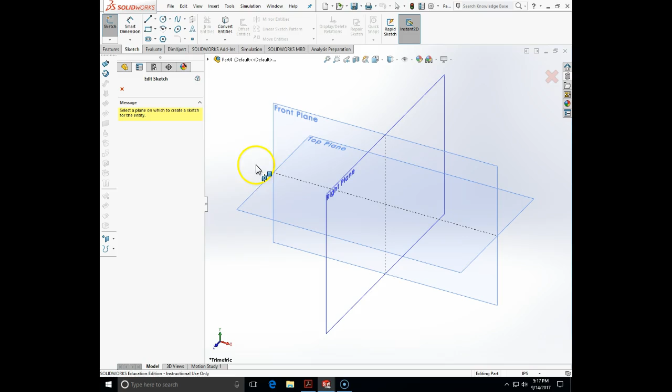We are going to do the exercise on page 310, number 5, 7. We are going to make 3 parts, which we are going to mate. Let's start with the block bottom, and this part is in MMGS units.

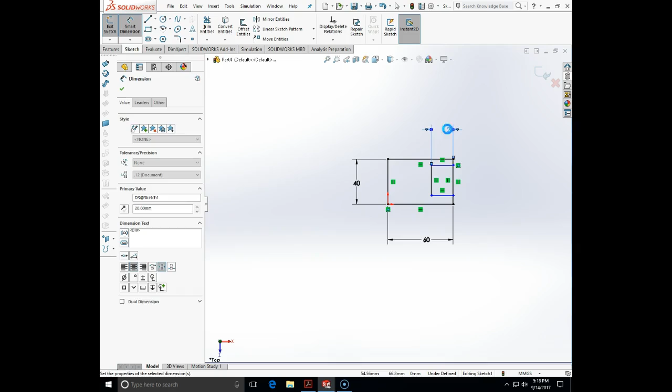Set it to millimeters. Probably the most efficient way is to make a rectangle of 60 by 40, and then we can make another rectangle inside, where the length of the inner rectangle is going to be 20, and the top and bottom distance is going to be 10 and 10 millimeters respectively.

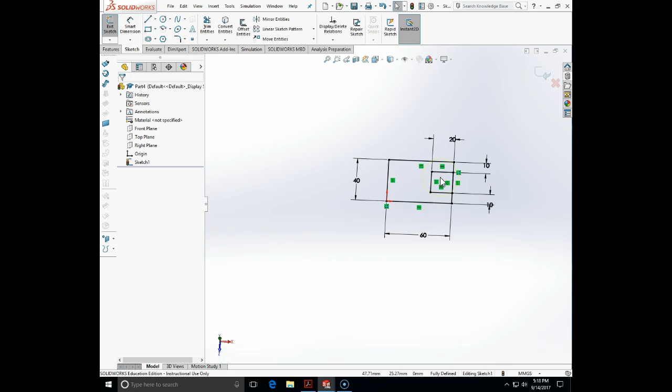Let me show you here a technique of the master sketch. This master sketch we will use to produce two extrusions: one which will be 15 millimeters thick, and that will be the entire block, and a second one which will be a top, which will be a total of 30 millimeters thick. How can we do this? We will use one sketch to make the two extruded boss features.

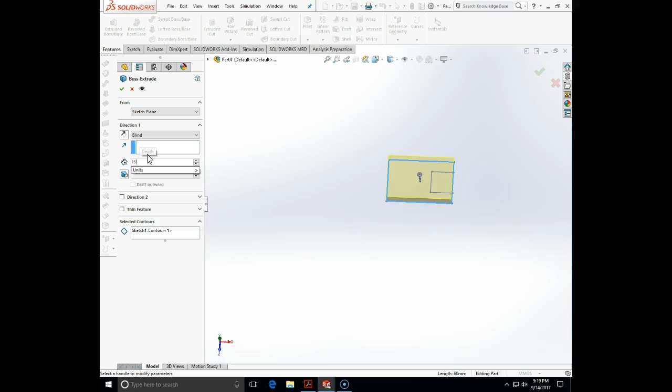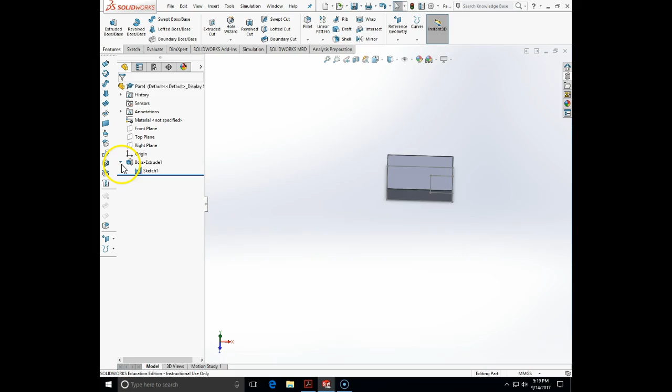I will click on the arrow, right click on the sketch, and left click on the eye. So again, I will click on the arrow in front of the boss extrude, right click on the sketch, and click on the eye to make it show. That way, look what happened -- my sketch is now shown.

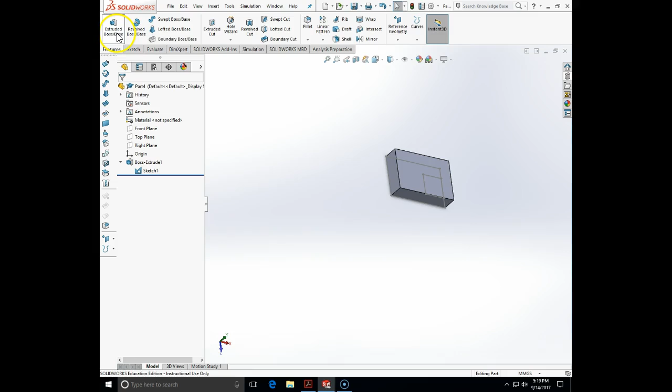Now I can reuse this sketch and its features to build the next part. So I'm going to choose the inner contour, and I'm going to extrude that inner contour as per my drawing to a 30 millimeter height. And look, I used a single sketch to create that.

Now to finish this part, I need to place a hole, and I will use the hole wizard. This is a 15 millimeter hole, M15. Let's try ANSI Metric -- it will be here somewhere. Well, ANSI Metric does not have a 15.

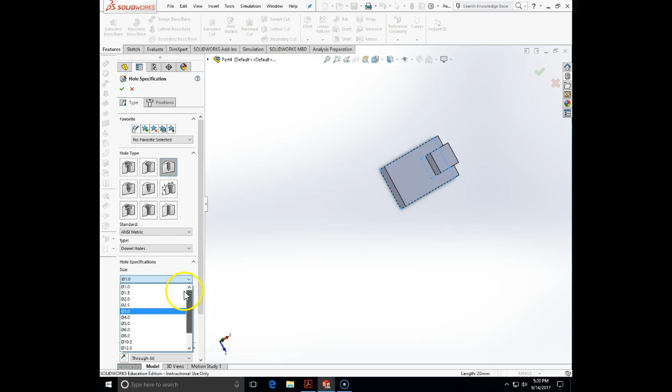Let's see if the DIN has a 15. If not, then we are going to make one. Nope. So then we need to go to a generic hole, simple. And in a generic hole we can specify whatever we want for a diameter, 15.

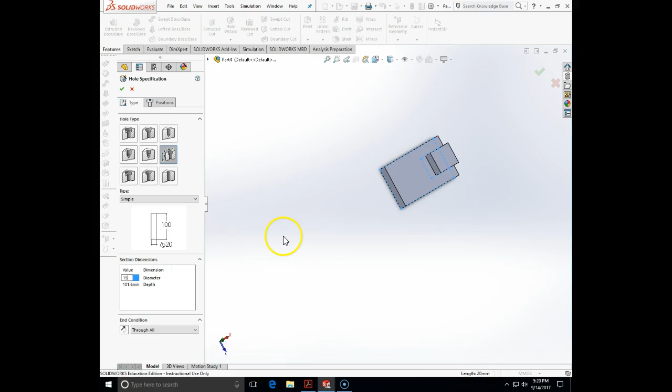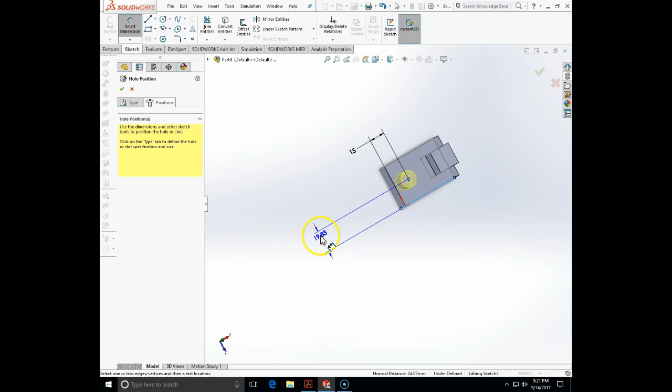Through All. Then I position the hole on this surface, and I'm going to dimension the hole to be 15 and 20, and that will be 15 and 20. Click OK, and here is my part made.

I save this as block bottom, under ENGT131, but on... where is my other drive? Okay, so it is under ENGT131, block bottom.

Now I'm going to make the block top. Do you see some similarities with the block top and block bottom? Who can tell me what are the similarities between the block top and block bottom? Both have the same dimensions. What is the only difference? Yeah, the other recess, hole.

So maybe we can actually do this. Do I need to draw everything again? No. So what I will need to do, there are two different ways. I will not introduce you yet to a configuration, but I will introduce you to something else -- how to derive one part to another by saving.

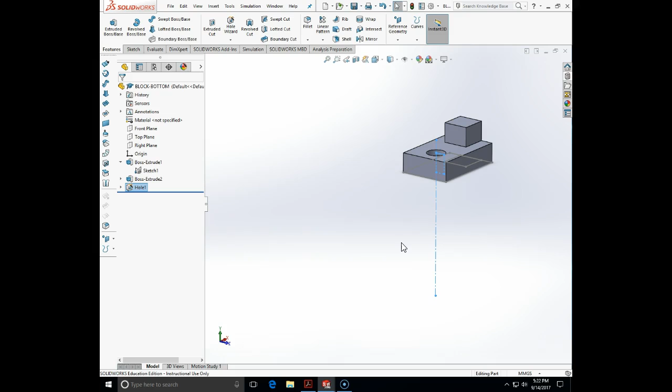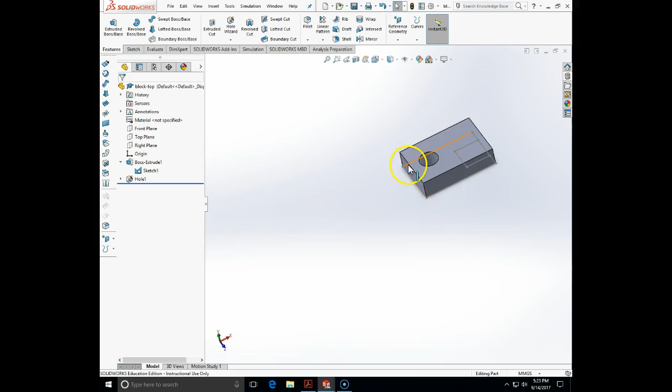I will save this part, save as block top. And now I'm going to delete my boss extrude tool. So I save it under a different file name, deleted boss extrude 2, and what I need to do is the cut. Through All. And look at this, with 3 clicks of the mouse, I have created the second part. How cool is this? I don't need to redraw everything.

Another way to do this will be to open the sketch, Ctrl-C to copy all the sketch, and then Ctrl-V to paste it into the new part. Okay, so we created the block bottom.

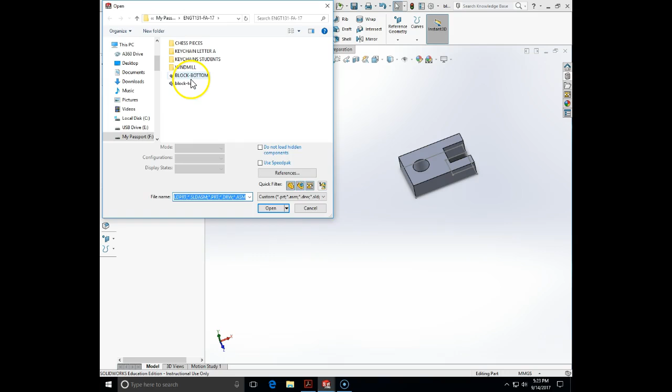We have a block top, and we have a block bottom also. Let me file open block bottom. So we have now those two. And what is the last part that we missed there? Pin.

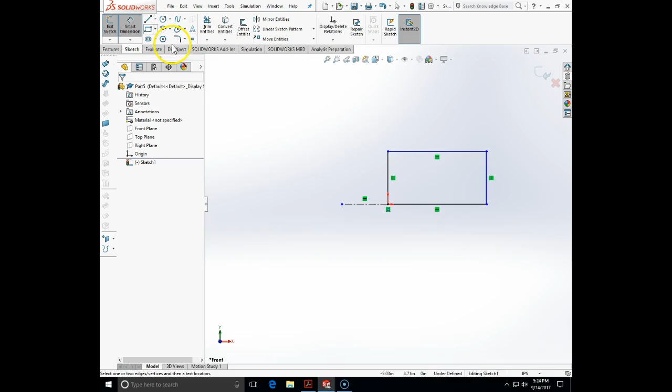And to make that pin, the post, that's a 15-15 post, I'm going to just make one rectangle, and specify a center line. I'm going to make the rectangle length of the pin -- what is it, 30. And I'm going to make the diameter by clicking on the outside to be what -- 15. Now I'm going to, in features, do a revolve.

Click OK. And what else is missing here? Chamfer. So under fillet, press on the arrow, press chamfer, and this is 2 millimeters. I did just one mistake -- what did I just do here?

IPS. So now this is 25.4 times larger. Well, I have two options. What will be the simplest way to save this? How about if I scale it by 1 over 25.4?

Yes. So features -- if I go into features, insert, actually let's see, there is a scale option. Features, where is the scale here? Go where you are. Go right -- it's under rib. No, the rib -- oh, here, under rib. Okay, scale. So 1 divided by 25.4, uniform scale.

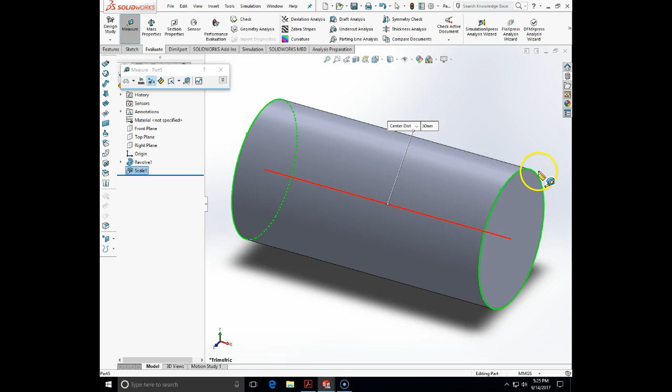One more time, can you show where... yes, okay, so I will delete the scale. So now this part is 25.4 times larger. So how can I scale it down? I will insert the scale feature. Insert feature.

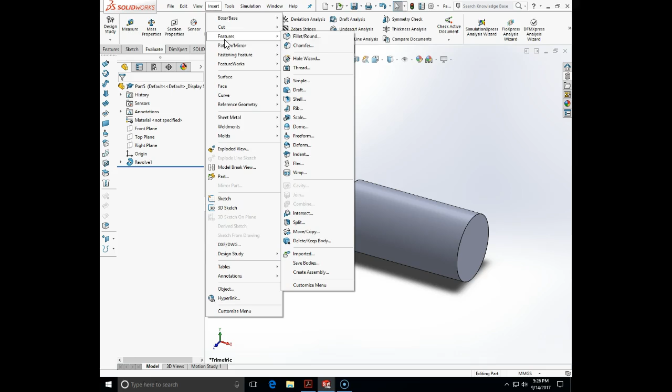Scale, around centroid, and this is the conversion factor. How I know it is 1 divided by 25.4, because there are 25.4 millimeters in 1 inch. And I click on the feature, and that's it.

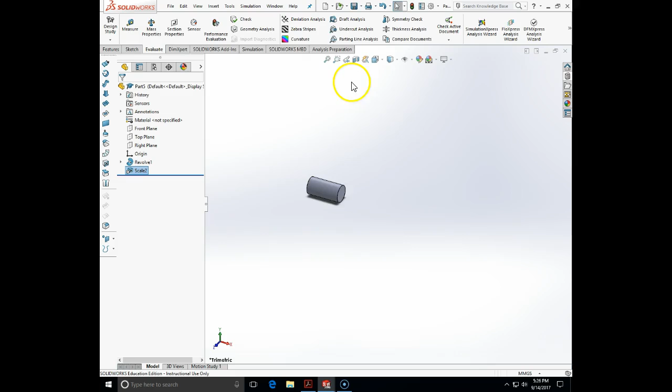And now I can insert my chamfers. 2 millimeters at 45 degrees, and I will choose my two edges. And I will save this as the D15 post.

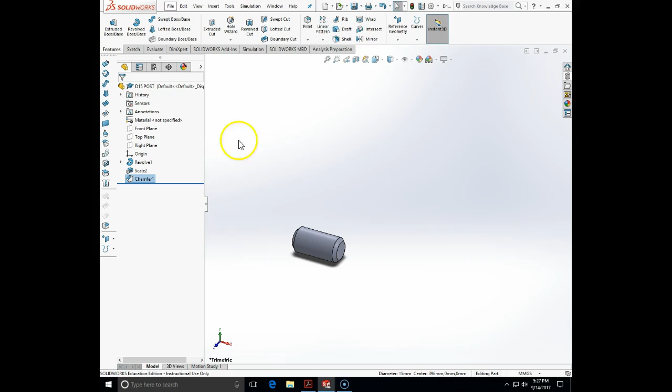The D15 post. Now I'm going to make an assembly to demonstrate to you the centered mate, the concentric mate. So we will go to the window of my block bottom, because that's my base. Going to make file, make assembly from part, block bottom, click OK, and I brought it in.

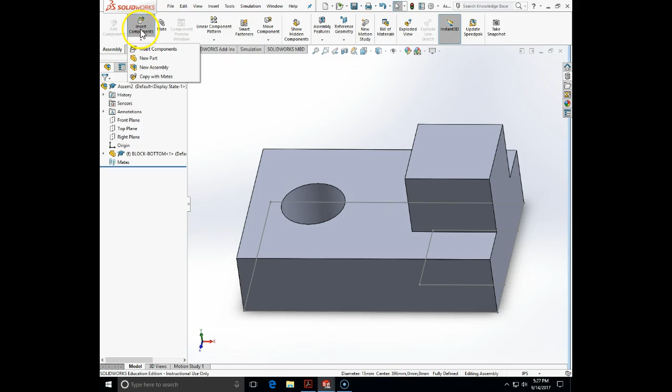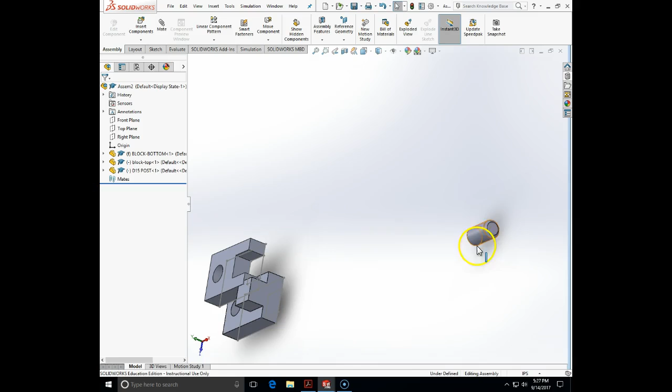Now I'm going to insert two other components. Go to insert components, insert components. I will insert the block top somewhere, and I'm going to insert the pin, the D15 post. Doesn't matter where, and orientation, okay. And I'm going to make this float, others float. Okay.

Here are now my bin of parts, and what I need to do next is mate them. The mate I want to show you today is the center mate, the concentric mate. Concentric mate is this one here. For the mate selection for a concentric mate, we need to take a cylindrical or conical surface, or any surface which has an axis of symmetry.

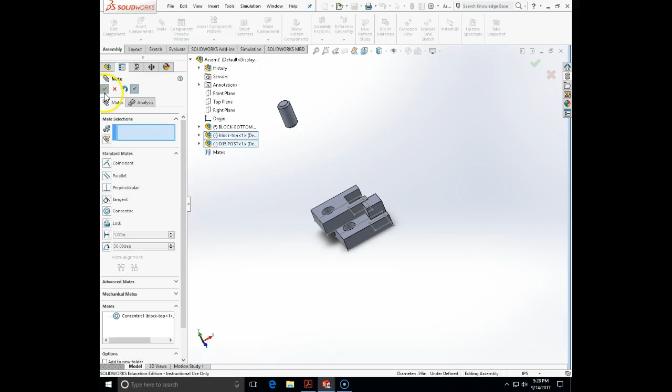So I will choose the cylindrical surface of my pin and where I want to mate it, with the cylindrical surface of the hole. And look what has happened. Now this pin is aligned with my top hole. So those two are now aligned.

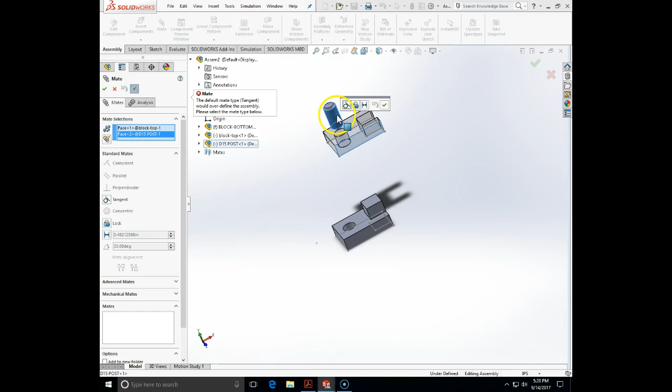Now I will do it again, and I'm going to mate concentric. I will mate the cylindrical pin with what? How about if I mate it with another hole, side the other part, and that's not tangent, that should be concentric. So mate concentric, click OK.

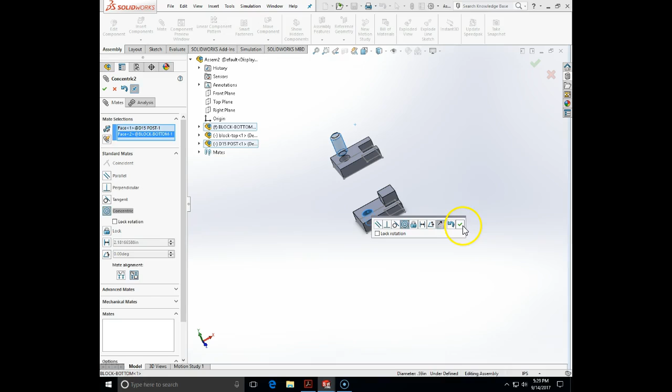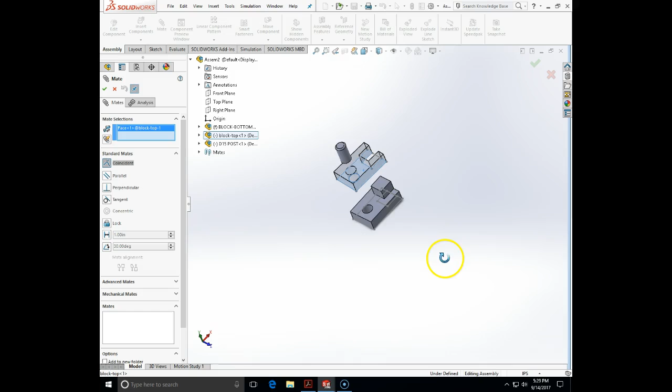Now I can't move this part anywhere, but I can still rotate it. So what I need to do next, I will use the mate which we learned last time, which is what? Coincident. So I will click on coincident. I'm going to glue the top piece to the bottom piece. Click OK. And I'm going to mate, let's say, the front and front together. Click OK. That's enough of mating this one.

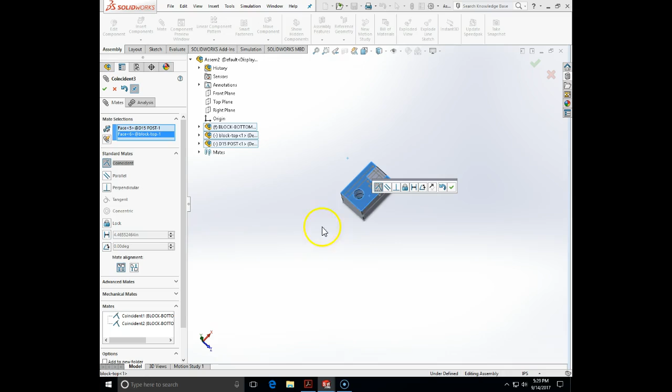And the last mate will be the top of the cylinder to a top face here. And I can also click OK here. You see that it is still underdefined, although nothing can move. But there is one thing that can move. Who can tell me what can still move?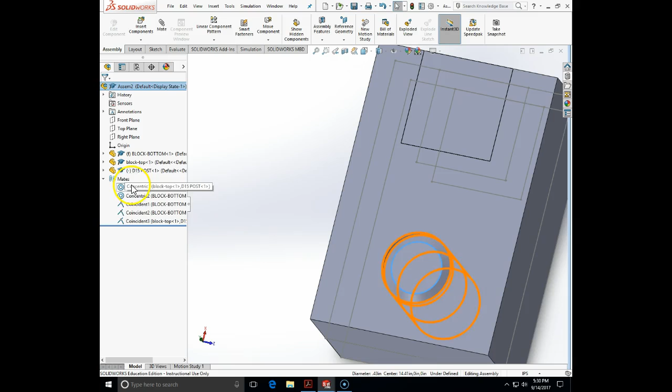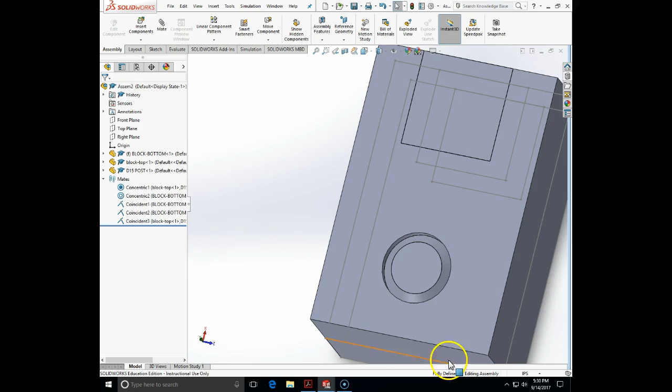The pin can rotate. So if we now open the mates, and if we check any of those concentric mates, let's say edit feature on a concentric mate, there is a box which says lock rotation. If I click on the box to lock rotation, look what will happen. It will change to fully defined. And now if I grab it, I can't turn that pin. So it will be kind of like, let's say, a press fit pin versus a loosely fit pin.

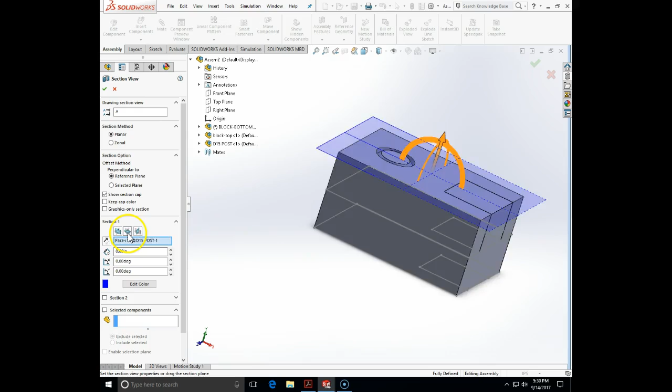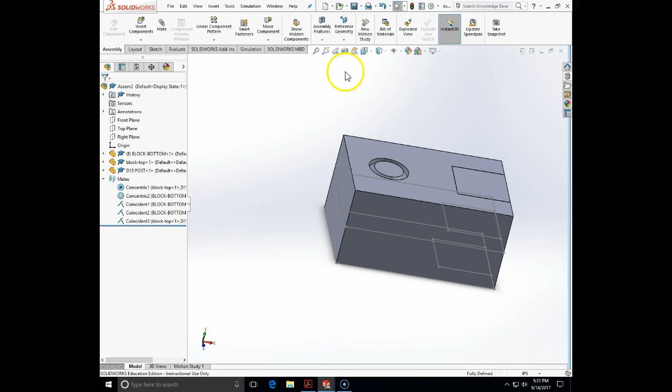Assembly, we can also add some stuff here to the assemblies on the annotation side. How about what is the most important, how we reference parts in the assembly based on the numbers, like part 1, part 2, part 3. So we need to create a balloon. So let's see, where is that?

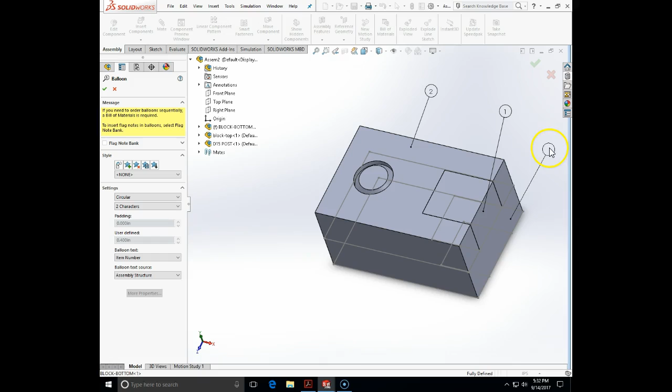If I go to insert, and if I go to annotation and I click on the balloons, balloon text, okay. We should go with the auto balloon. Okay, that's mine. I just click on a piece and it will tell me the balloon. I will delete this balloon because we have a duplication. So look, now it tells me part 1, part 2, part 3.

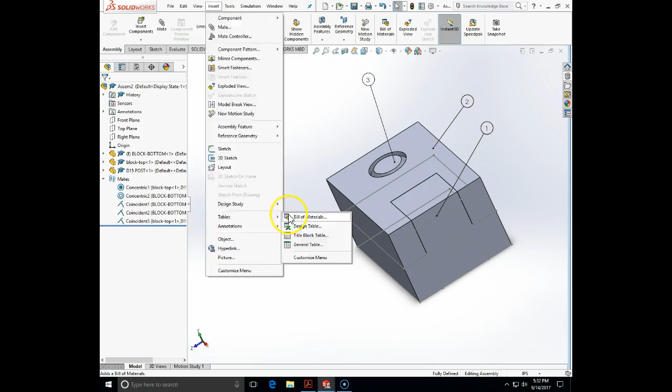I can insert, under the tables, bill of material, part level. We will go through the bill of materials. And look what I got here. I can actually insert a table even into the assembly mode to help me as I continue assembling it.

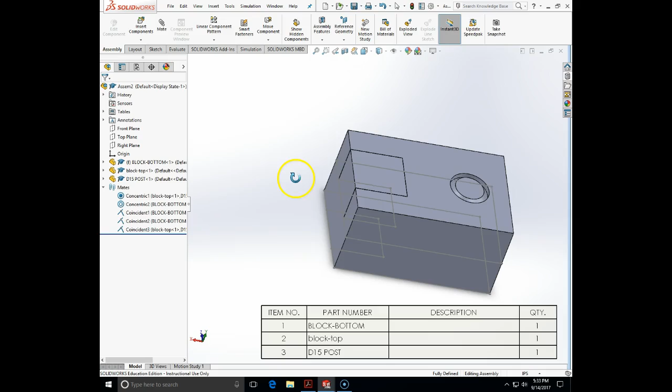Okay, so this concludes this demonstration. Today, in these 15 minutes, we learned how to use the concentric mate. We learned how to reuse the part to create a second part by saving it. We will learn again this, how to do with configurations. And what else did we learn? How to fix the part if by error we do it in a different unit system, like how we can convert a part from inches to millimeters or from millimeters to inches. This concludes this demonstration.